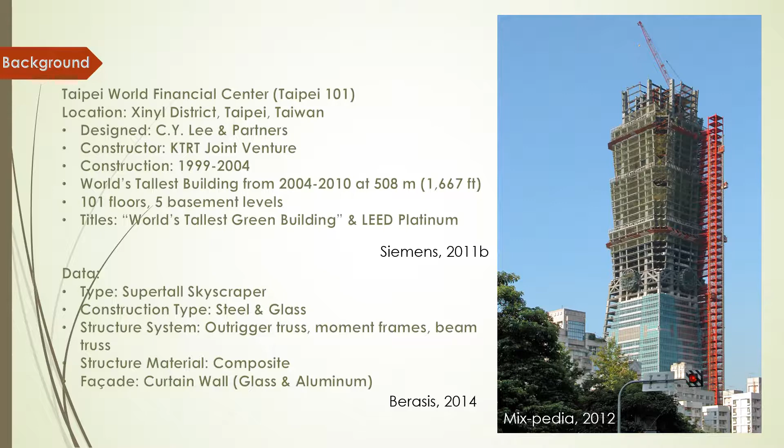With the LEED rating system being created in 1998 by the U.S. Green Building Council, it was not well known in Asia during the construction of Taipei 101. However, Taipei 101 was still conceived to be an eco-friendly building from the start. Reduction in carbon emissions and energy efficiency was of utmost importance to the owners. The building was equipped with the Siemens Apogee fully integrated management and control system to control the building's complex scheme. Taipei 101 was also equipped with the largest water distribution system in Asia, an advanced temperature control system, Osram lighting system, and advanced air distribution center to make the building highly energy efficient.

In the interest of promoting green construction and operation, Taipei 101 officials decided to attain international recognition and global acceptance of their green operations by pursuing LEED certification in existing buildings, operation and maintenance by the U.S. GBC. To accomplish this, Taipei 101 teamed up with Siemens, Steven Leach & Associates, and Ecotech International to identify areas for improvement, suggest and design system upgrades, and garner the support of all the tenants to embrace the greener approach to life. This process began in 2009 and took 21 months to accomplish at a cost of NT 60 million or US 2.08 million at 10,000 person hours.

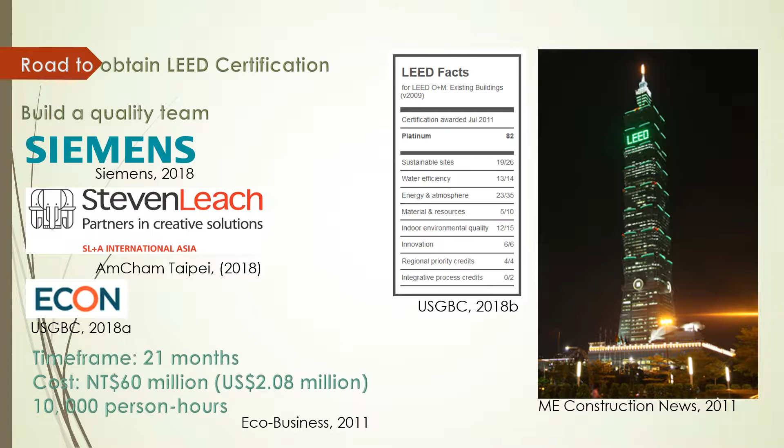Initially, Taipei 101 aimed to achieve a gold standard certification in existing buildings in operation, but after the initial evaluation by the aforementioned consulting team recognized the anticipated LEED score was already high, it was decided by the stakeholders to upgrade the application from gold to platinum. In 2011, Taipei 101 was awarded LEED Platinum certification in existing buildings operations and maintenance with a score of 82.

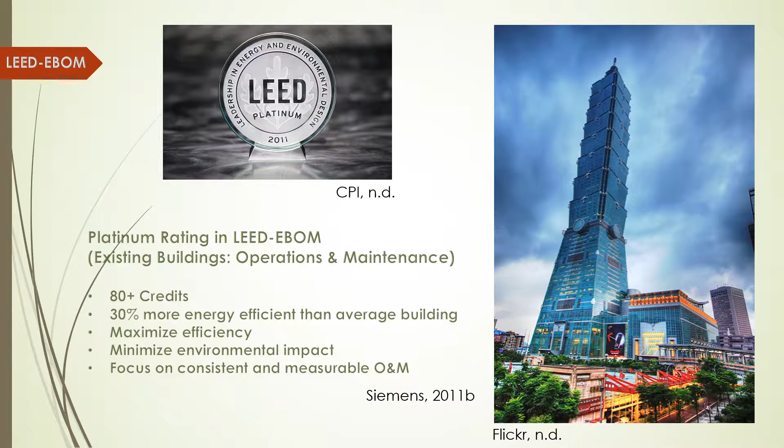To obtain a LEED Platinum rating, a building must earn 80 or more credits, be 30% more efficient than the average building by maximizing efficiency and minimizing environmental impacts by focusing on consistent and measurable operations and maintenance. The following slides will discuss and summarize the LEED scorecard by category.

Taipei 101 obtained 19 of 26 credits from the Sustainable Sites category. Since Taipei 101 was not constructed under LEED process, it was not able to garner any points under the SSC1 LEED certified design and construction. Due to the type and size of the structure and limitations for on-site landscaping, Taipei 101 adopted the nearby Xiangshan Park to implement sustainable landscaping practices to achieve sustainability goals of SSC5 for the project. To satisfy the requirements, it aimed to restore and protect habitats that allow native flora and fauna to flourish.

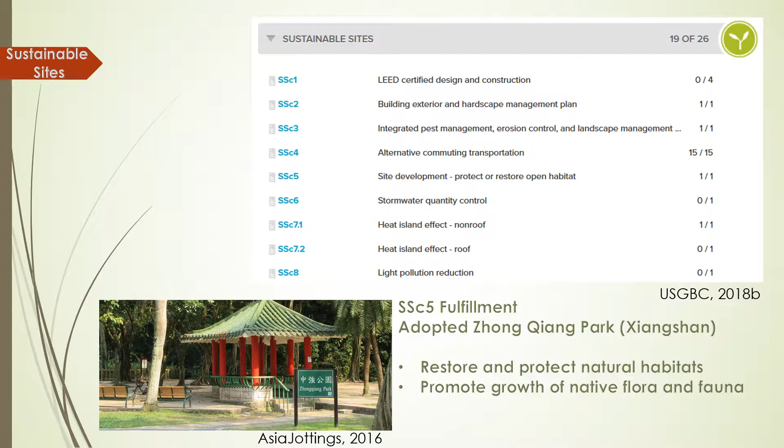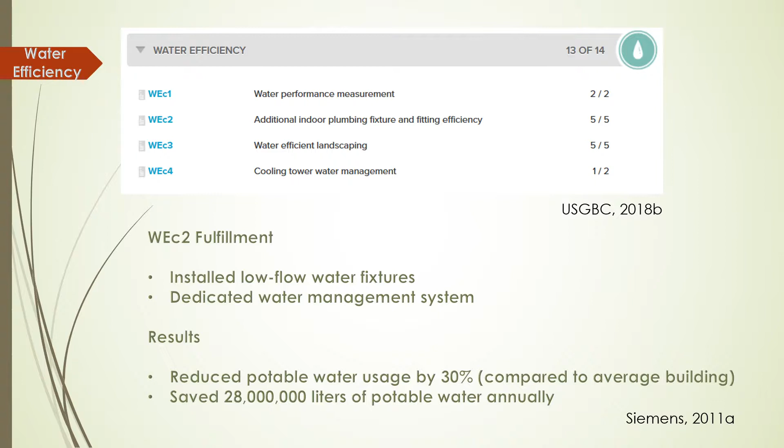Taipei 101 obtained 13 of 14 credits from the water efficiency category. To reduce water usage, Taipei 101 fulfilled WEC2 by introducing low-flow fixtures in conjunction with a dedicated water management system that reduced water usage without jeopardizing tenant gratification. This modification enabled Taipei 101 to decrease potable water usage by 30% as compared to an average building equivalent to its size, which accomplished savings of approximately 28 million liters of potable water annually.

To fulfill EAC2, Siemens identified areas for improvement, helped implement necessary strategies, and advised the operators on construction and usage of equipment to attain energy savings and air quality improvements through use of their energy modeling and control system. This system offers energy modeling and audits, increased sensor locations, and commissioning services.

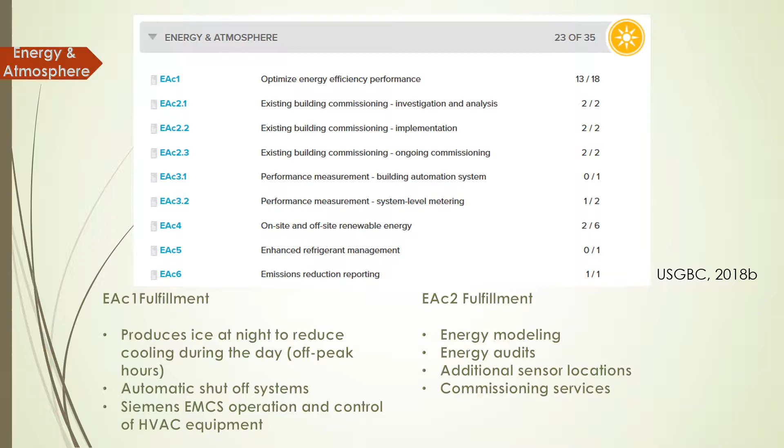EAC1 was similarly attained through use of this system by producing ice at night when power rates are cheaper and the external temperatures are lower to assist in daytime cooling. Similarly, the EMCS system monitors area occupancy and automatically shuts off the air conditioning and lighting system to uninhabited areas.

Taipei 101 obtained 5 of 10 credits from the Materials and Resources category. Originally, Taipei 101's OSRAM lighting system consisted of 12,500 fluorescent lamps, 3,800 energy-saving lamps, and 2,400 halogen lamps.

To satisfy MRC4, they replaced the original fixtures with low mercury and no mercury fittings to reduce exposure levels to potentially toxic pollution. These new fittings reduce mercury levels to 58.5 picograms of mercury per lumen hour, which is 35% lower than Taiwan's maximum permissible baseline of 90 picograms of mercury per lumen hour.

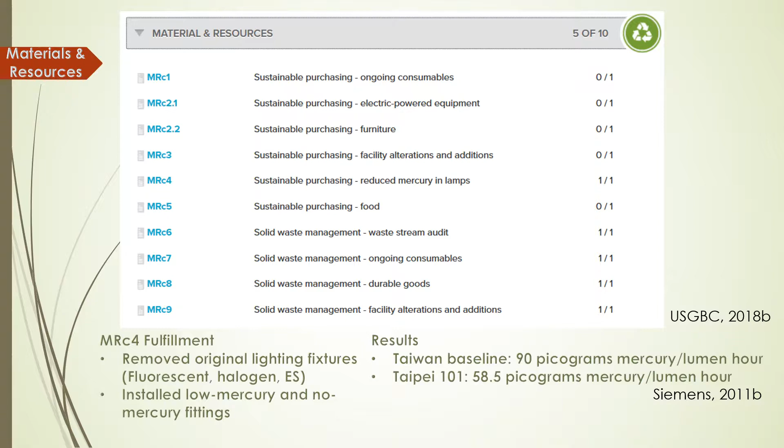Taipei 101 obtained 12 of 15 credits from the Indoor Environmental Quality category. The Indoor Environmental Quality was the second category Siemens was instrumental in affecting. Through its EMCS system, the building was able to adjust indoor air quality and keep CO2 levels at 600 parts per million or below by drawing in outside air as needed, which satisfied EQC 1.1.

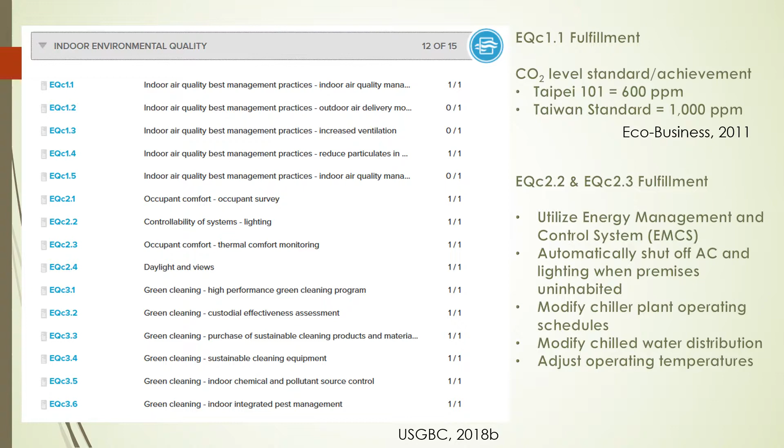The EMCS similarly addressed EQC 2.2 and EQC 2.3 by allowing building operators to control AC and lighting, modify chiller operating schedules, chilled water distribution, and operating temperatures to the actual tenant's needs.

Taipei 101 obtained 6 of 6 credits from the Innovation category. Siemens consultants trained the tenants how to properly use the control system to fit their needs and explained the consequences of improper use. Similarly, the aforementioned changes in energy strategy and management, such as producing ice for cooling during off hours, improvements in operation, and controls of the HVAC system led to gaining all 4 points of IOC1.

Additionally, officers of Taipei 101 garnered the expertise of the LEED accredited professionals with Siemens, Ecotech, and Steven Leach Associates to lead the innovative activities in achieving the Platinum certification.

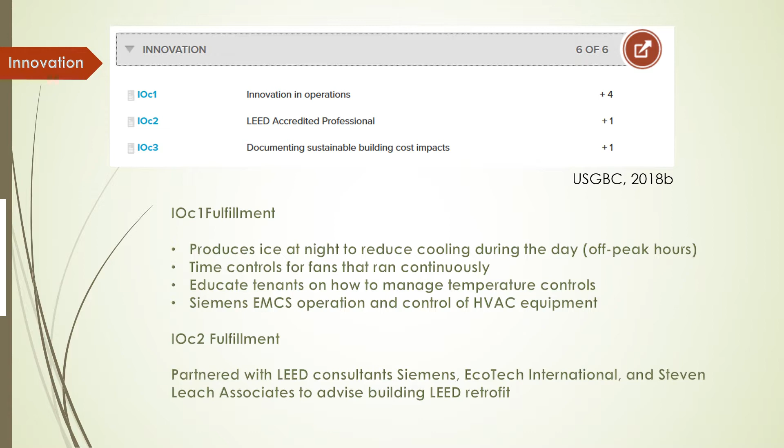Taipei 101 obtained 4 of 4 credits from the Regional Priorities category. The regional credits were pulled from other categories of particular importance to their specific areas that address geographically specific environmental priorities.

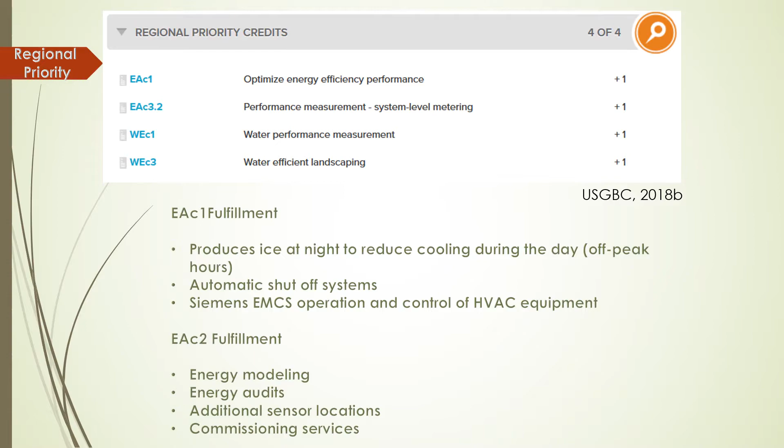All of these upgrades to Taipei 101 resulted in it being awarded LEED Platinum status in EBOM in 2011. The enhancements as compared to 2007 levels allowed the building to annually reduce CO2 emissions by 2,995 metric tons from electricity, gas, and oil use. That is equivalent to preserving over 9 acres of woodlands or 239 cars being removed from the roads for a year,

and a 10% reduction in other uses by decreasing potable water use by 28,000 metric tons, garbage by 1,261 metric tons, and electricity by 4.8 million kilowatt-hours. All these changes combined equaled a 30% reduction in energy consumption for an annual savings of NT 20 million or US $700,000. Therefore, Taipei 101's return on investment paid for itself in less than 3 years.

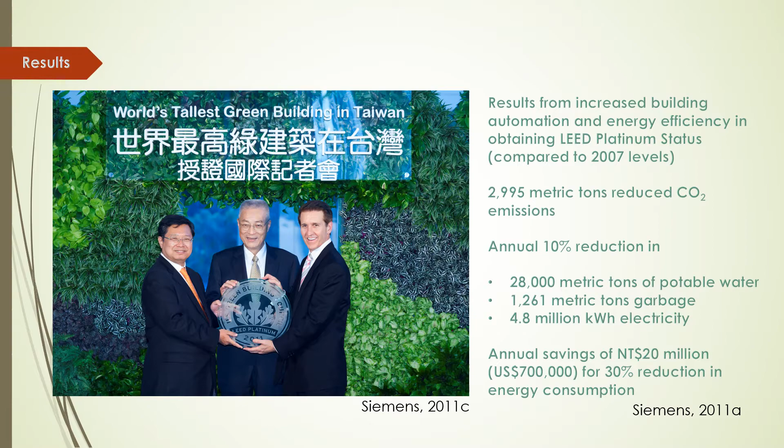Taipei 101 made the impossible possible and is a trailblazer in retrofitting existing buildings to achieve LEED rating. By their example of setting hallmarks of best practices and proving super tall skyscrapers can indeed be sustainable, Taipei 101 sets the example for the rest of Asia to emulate.

Their achievements and persistence to promote green building can be summarized by USGBC chairperson Mark McCracken. He said, "People would say, 'Oh, we can't do that. We are too tall. We are too this. We have too many tenants,' this sort of thing. That discussion's now off the table because of this building, and I think that's the biggest statement Taipei 101 made for the industry."